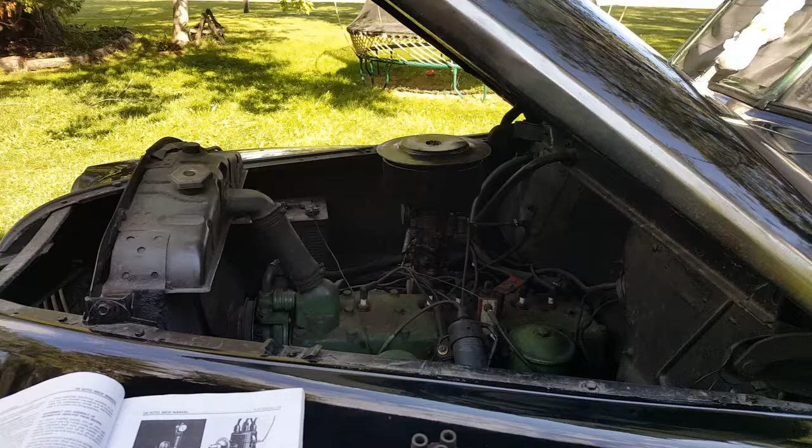Right, so if you watched my previous video, I showed the DeSoto finally starting again. The paint is coming out really nicely as well, I think. And see, very, very smooth, very mirror show car finish. Lots of dust outside though, but oh well.

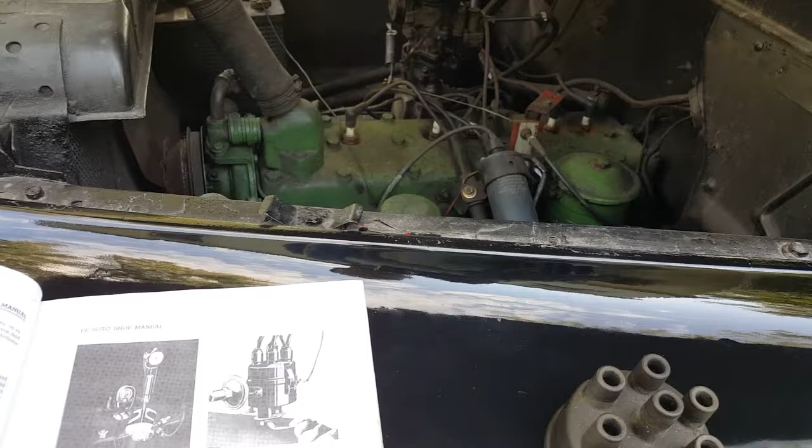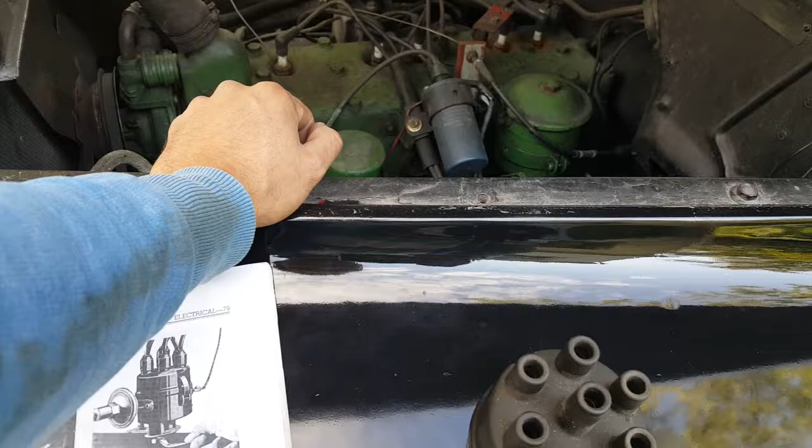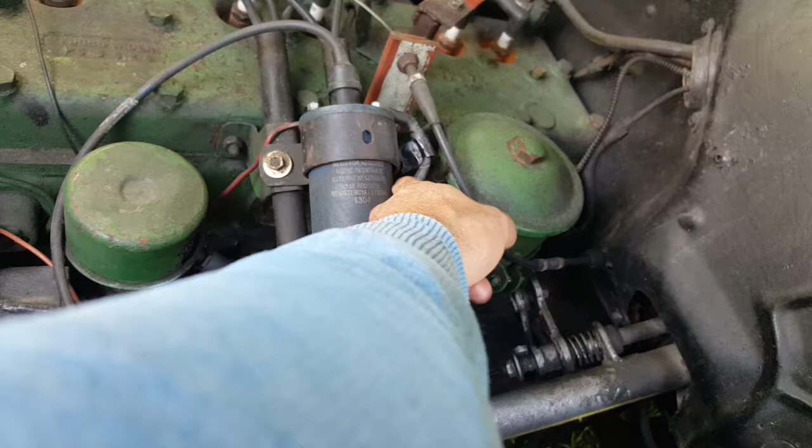So anyways, after checking, following the wires and distributor cap, so if you know the ignition coil is working and you know that you have electricity going to the wires, remember, when you turn on the ignition switch, it connects power to this wire here. The other wires just connect to the distributor and then to ground.

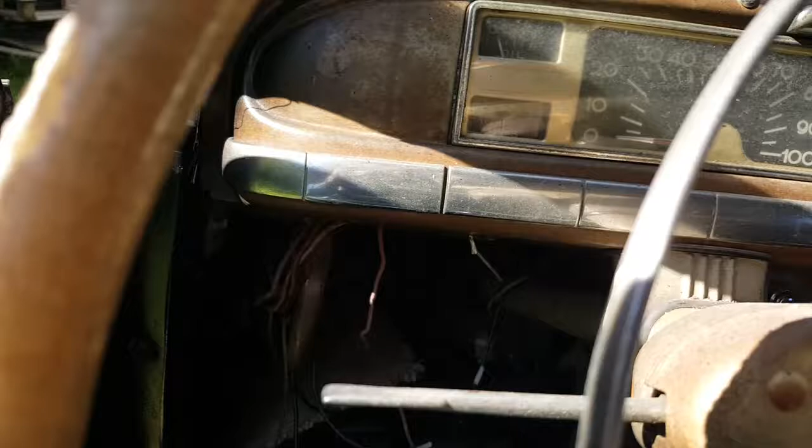So one indicator that you are actually getting electricity going to the coil is that when you turn the ignition on, the ammeter, I'll show you that in a second, will move. So just watch when I turn the key, it'll move. So right now it's at 0. See that? Off, ignition on, off and on. There we go. Turn it off.

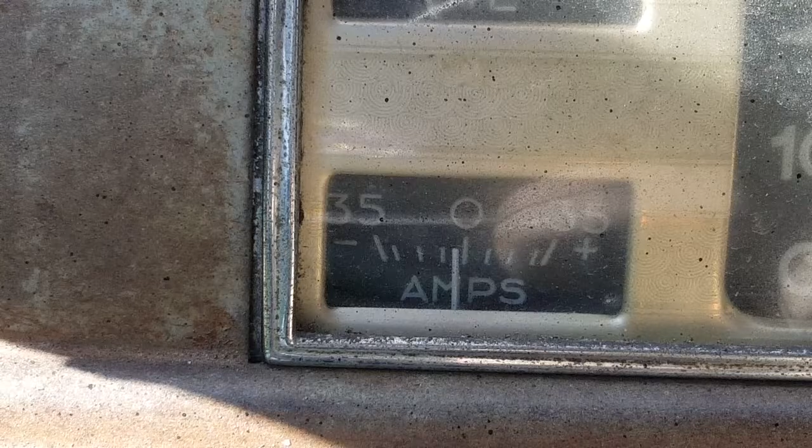Starter button there, by the way. There's the ignition key. So that's the ammeter. And the reason it will move is because the ignition coil, which is a transformer, will use up electricity. So if you leave the car in the on position, this might actually get hot depending on which position on the distributor it is in. If it's in a spark position, it will get hot. Okay.

But to make sure, you probably want to disconnect the distributor wire and touch it against something, see if sparks come out. But be careful, because I got a really nasty shock the other day. It won't kill you, but it'll give you a nasty shock if this wire isn't so good, which is the case here. Normally, if it's well insulated, you can hold it here without receiving a shock.

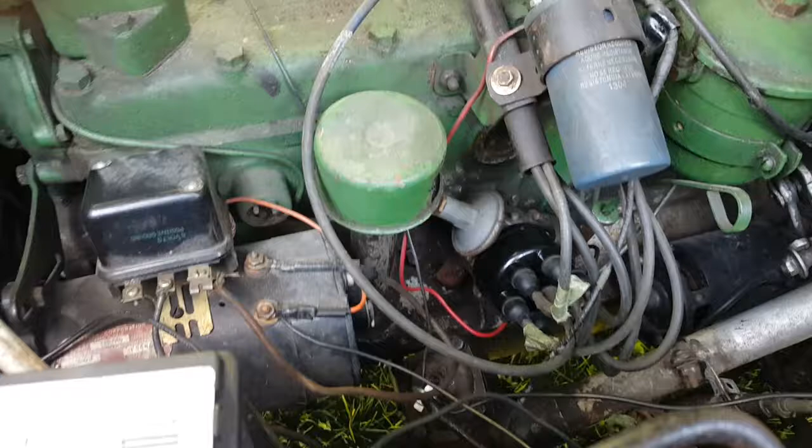But if it's broken somewhere, the electricity will leak through the break and go to your hand. So I know that the ignition coil was working from the nasty shock that I got. So I opened up the distributor, and sure enough, one of the most common problems you'll have is that there.

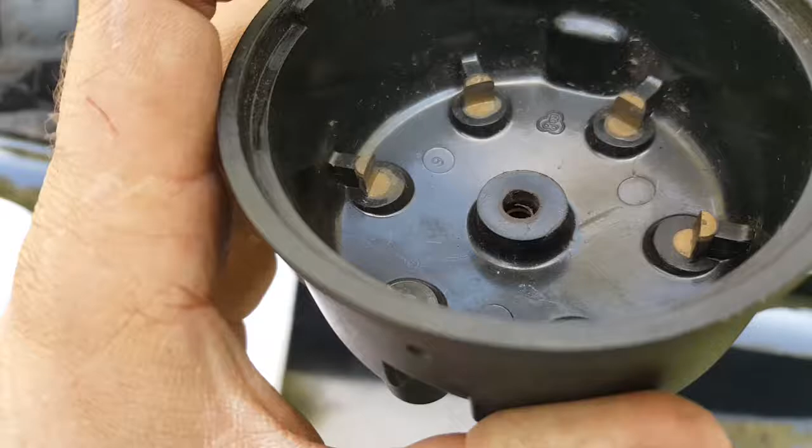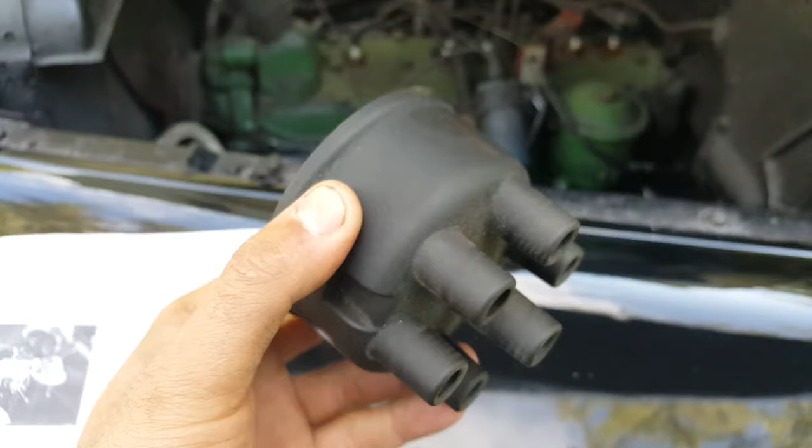As you can see, this distributor cap is missing the middle part. In this middle part, there's supposed to be a graphite rod, and as you can see, this one is missing. And there's rust there, there's a spring too, and it's one of those things that just happens. This is probably the original distributor cap from 1947.

I wish there was a way you could repair this. In an emergency situation, I could just stick in a pencil or a wire or a brass rod. That would be really nice in the middle there, so anything that would conduct would work here.

So the ignition coil goes to this middle part, through this carbon rod here, and to the top of the distributor rotor, which then rotates and transfers that spark, that electricity, to each of the spark plugs. It goes from here to there. So each one of these is for a spark plug.

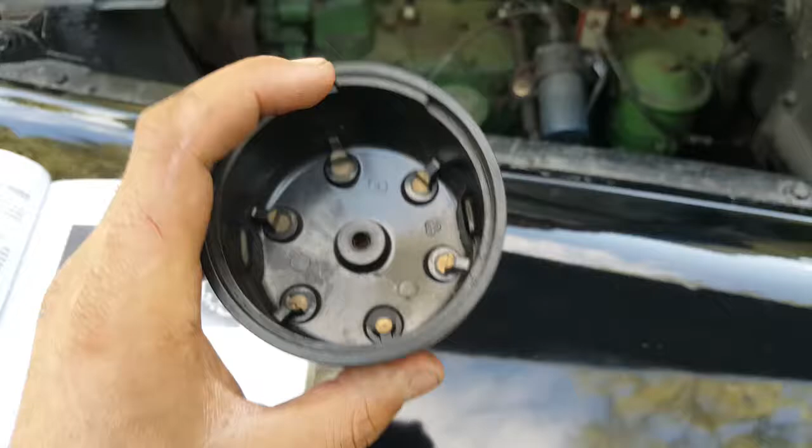Normally these distributor caps have a number so that you have a starting point for reference for which ignition wire or spark plug wire goes where. This one, I don't really think it does, or if it does, it's not really clear. There's a mark there, B with an infinity symbol, and there's a number 6 there, and indeed, this is where number 6 cylinder goes.

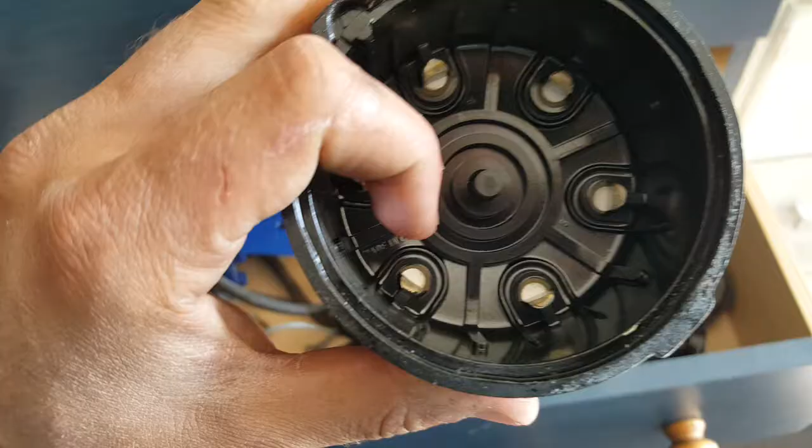But let me just show you what a new distributor cap looks like. This is what a good functional distributor cap looks like. You can see there's that little carbon rod in the middle.

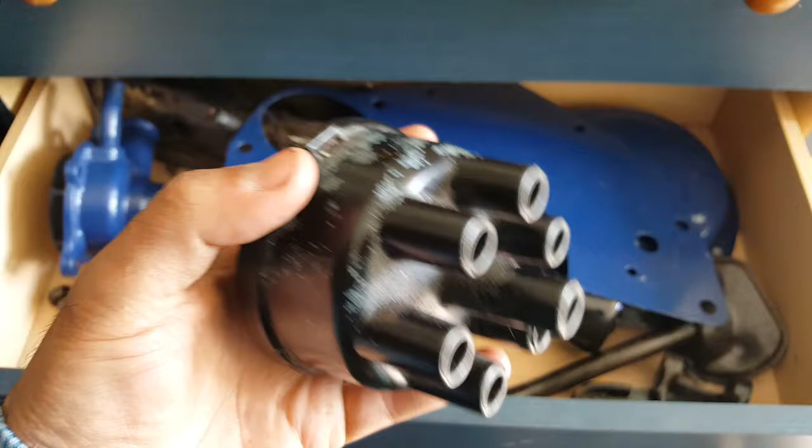Oh, and by the way, this is from the flathead on the 1963 Rambler American. And in an emergency situation, it would fit the DeSoto, believe me or not. It's not a direct fit because the clamps don't really match, but the diameter does fit perfectly. And if I was in an emergency, I would use this without a problem.

The distributor rotor, on the other hand, is a direct fit, and you can easily interchange them with the 1963 Rambler American, and I bet you most 6-cylinder cars. Just thought that would be interesting.

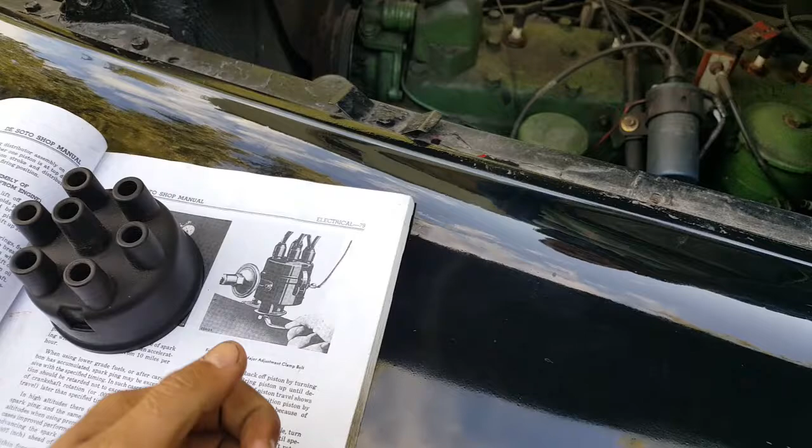So one of the first things you'd probably check, the most common problem, is this here. These distributors, like most things in these cars, are made of cast iron and steel, brass parts. Only the cap itself is plastic, but it's not really plastic. I think it's called Bakelite. But anyways, they're very durable. So the only thing that you'd probably break in a distributor is this middle part here. So probably one of the first things I check is that.

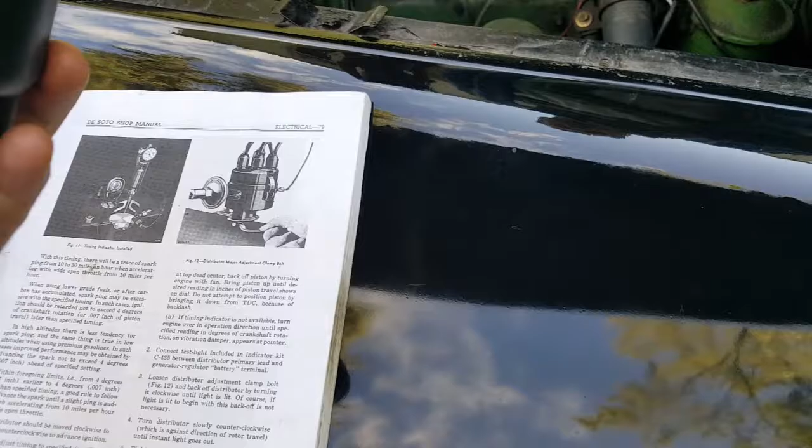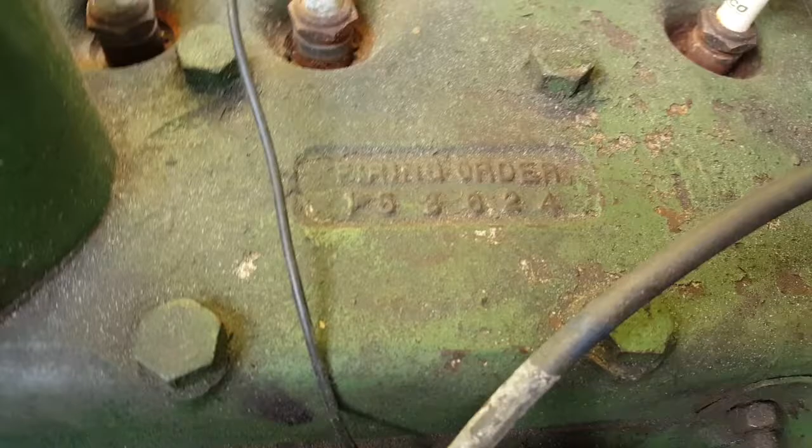Now, the other issue that I had is normally if you're going to replace the cap, you'd probably mark where the number 1 spark plug wire goes to. Reason being is, yeah, you think, okay, I know what the order is. Here on the engine it says 153624. However, you don't know the starting point of that order. So you could have the engine in a different firing position, let's say number 3 piston, and then you put the number 1 piston there in the firing order. Even though the firing order is correct, the position relative to the engine is not.

So the engine would not start, or it would at least run very badly. I don't think it would start at all, but in some cases I've heard of people saying that you could destroy an engine that way, although that's highly unlikely. It would probably just not start because the valves would be at the wrong positions. Okay, so that's why you'd normally want to mark the wires before you move them to make things easier.

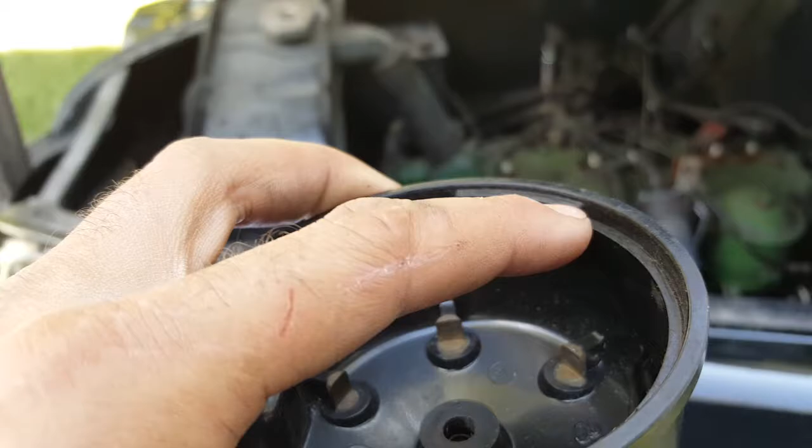If by chance you don't mark them and your assistants remove them, it was my fault. I didn't tell them to mark it first, so they ended up removing the spark plug wires. So I no longer knew what the correct position was. So fortunately on the distributor cap, that's why it's important here. Here's the reason why I need to have attention to detail. So if you look around it, right here, there's a ridge. Everywhere else on the distributor, it's just smooth. And over here you have a ridge, and that's there for a reason.

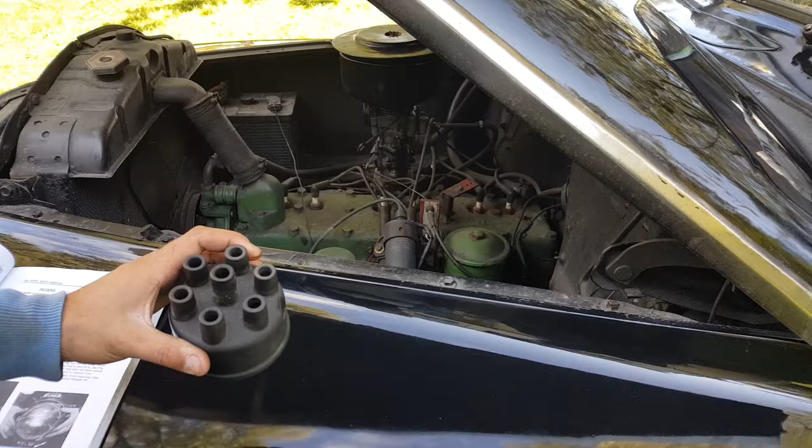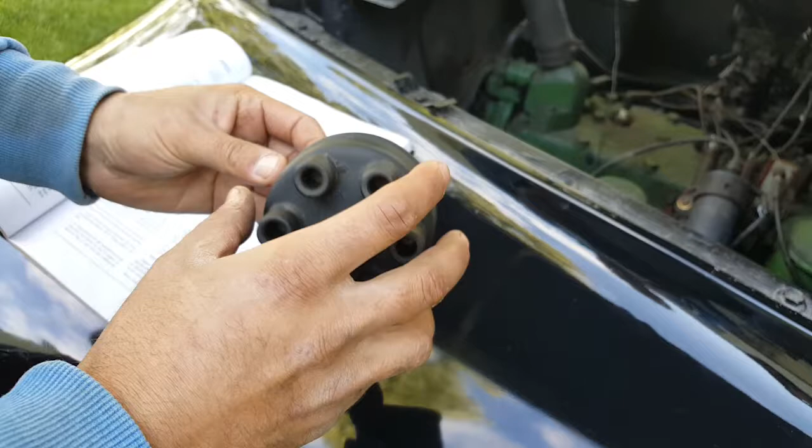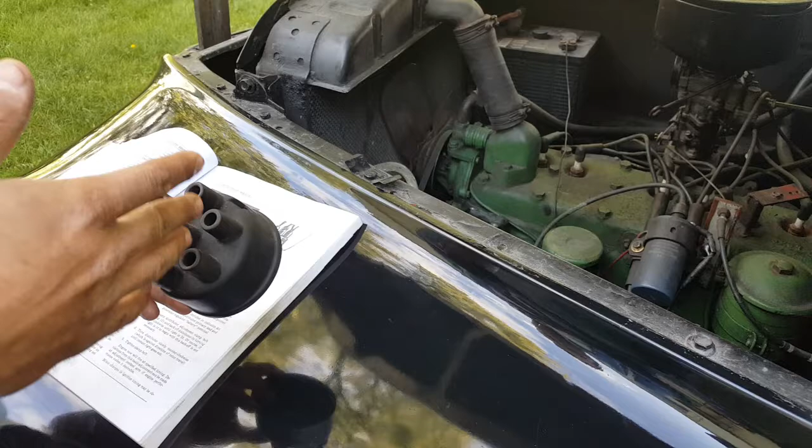That ridge matches on the distributor itself. So on the distributor cap, that ridge goes onto the distributor so that it's in the correct location, which happens to be about at left. So this distributor has a little hole, and that faces up at a bit of an angle like that. At first it took me a while to notice that, but that solves only one of our problems. It doesn't tell us which piston or which spark plug goes to which distributor cap point.

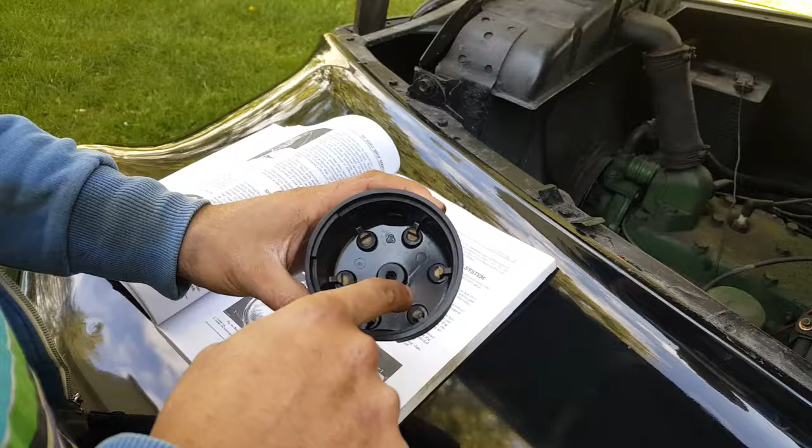In some distributor caps, you have them numbered, which is the case for the Rambler American. It says 1, so that you know which spark plug goes where. Fortunately, on the DeSoto, you go to the end of the electrical section. This is for the S10 model. This is for the S11 model.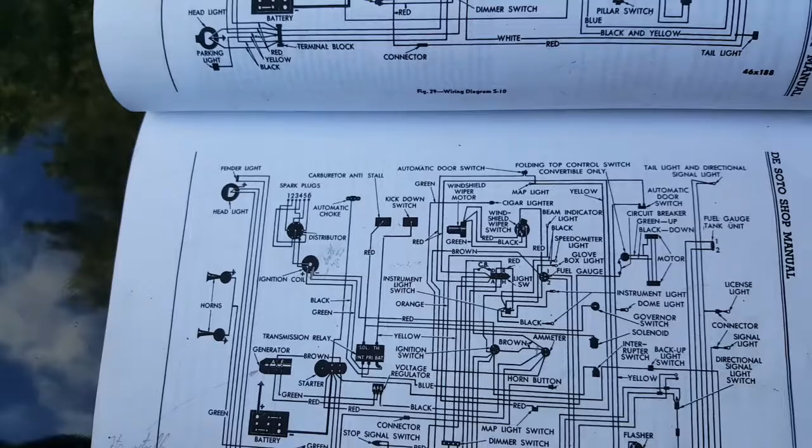And right on the distributor diagram there, it shows you where the wires go. You see some of these diagrams on other models, they're not to scale, they're not an actual representation, but in this case it is. So as you can see, according to that diagram,

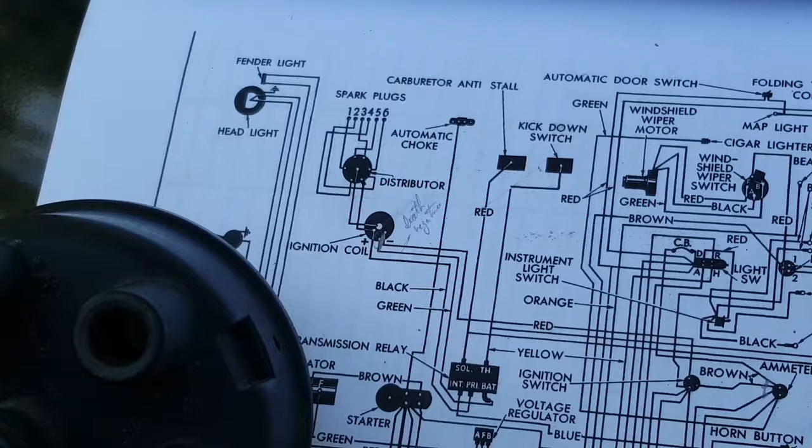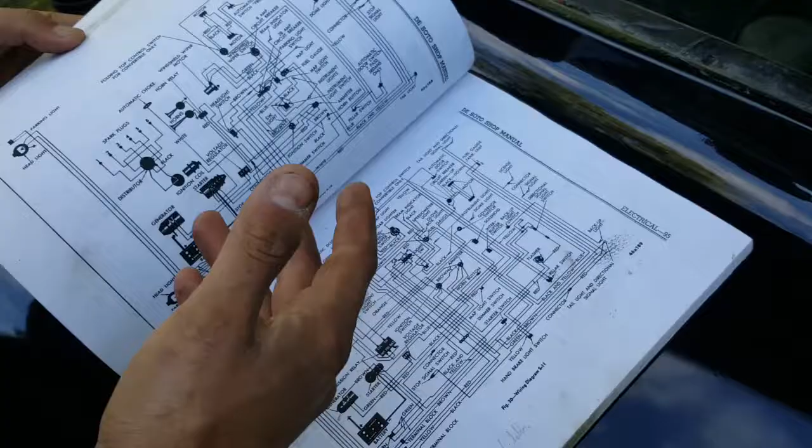number 5 would be this one here, and then number 3 would be this one here, and this one here is number 6. The one on the right is number 6, but as you can see, there's not really a mark there. So anyways, I have to check to make sure. This is why it's useful to have a manual.

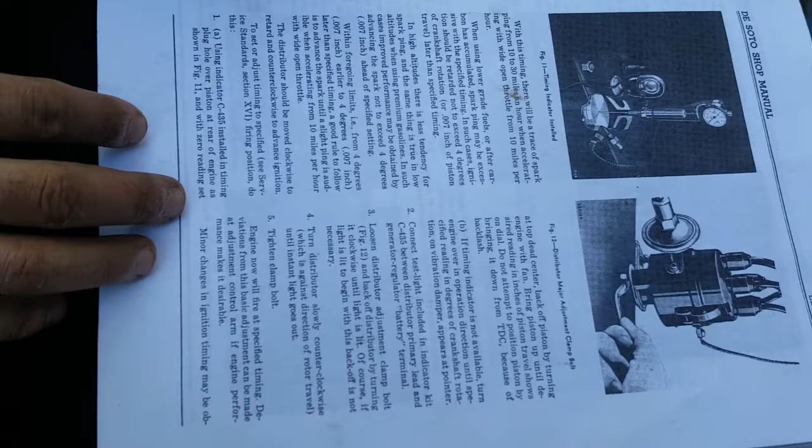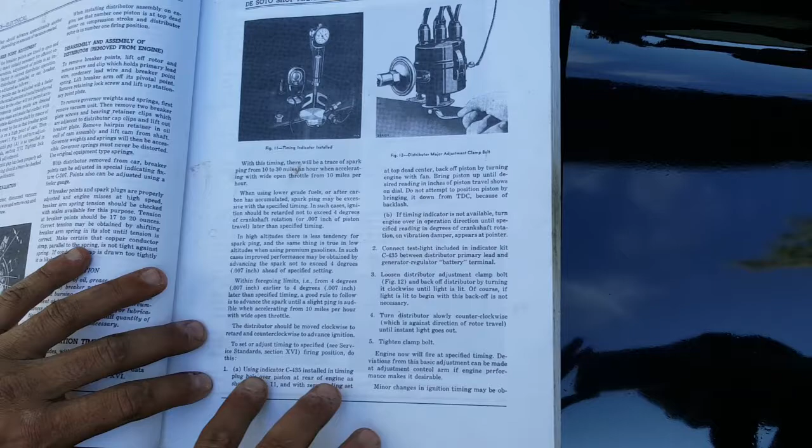So I went to the electrical section, which talks about the distributor, and it gives you the instructions on how to time the engine. And over here, to set or adjust timing to specified standards, firing position, use indicator, which is this one here. Install timing plug hole over piston at rear of engine.

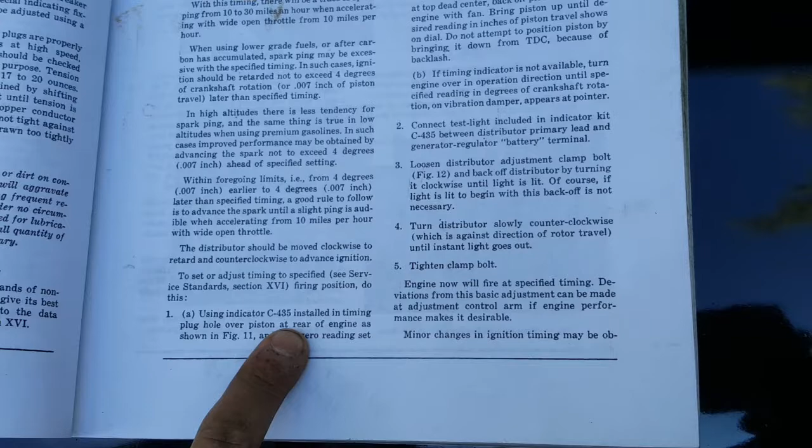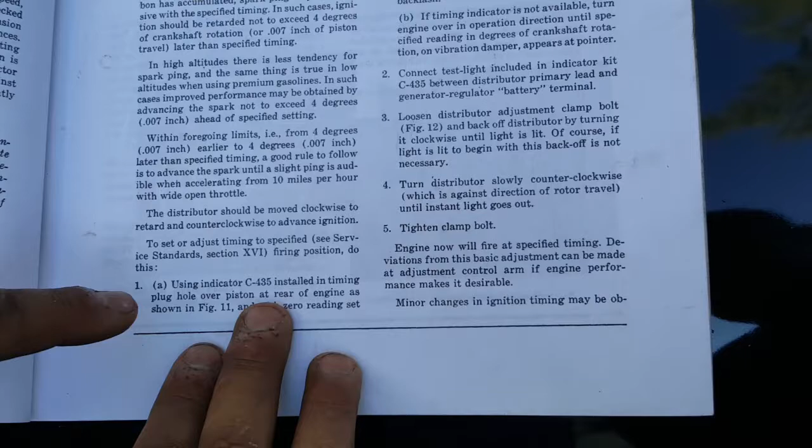And this is what really caught me. I'm used to most cars being timed relative to piston number 1. However, with the 1947 DeSoto, it's timed relative to piston number 6. That's why it says here, at rear of engine, as shown in figure 11. Figure 11 just shows the gauge for timing.

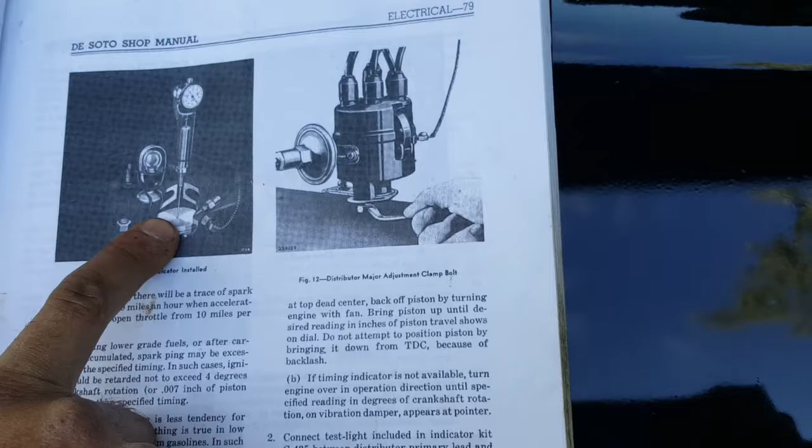In my case, I'm just timing it by feeler gauge, but at the rear of the engine, right there, as you can see, there's a plug, and that goes directly over piston number 6. So although the manual does not tell you it's actually piston number 6, it just says rear of engine, there's only one place where you could install that tool, because there's only one plug that's small, and it's directly over the piston, this plug here.

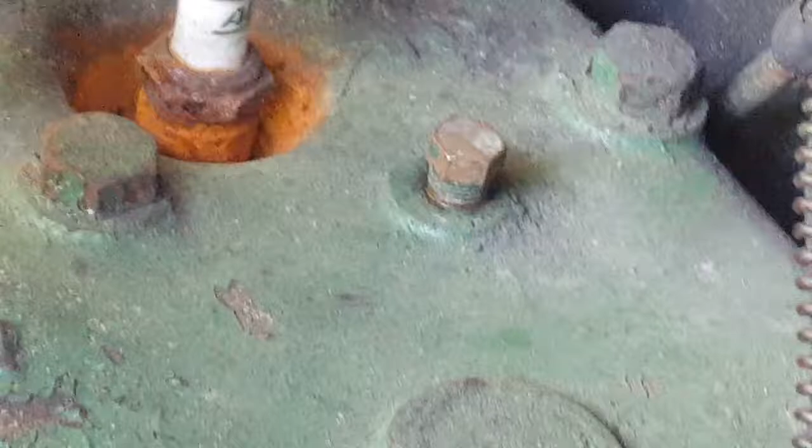You don't really need to remove it, but it just goes to show that this engine is timed relative to piston number 6. So piston number 6 at top dead center. That's what really confused me the other day, and we finally solved it. So you line up the marks.

That plug is really useful if you can't see the marks on the crankshaft pulley, which is usually the case. So you can mechanically know that piston number 6 is at the top. You just poke a wire in through that hole. Just be careful not to leave it there. So I removed that plug and made sure, sure enough, piston number 6 was at top dead center.

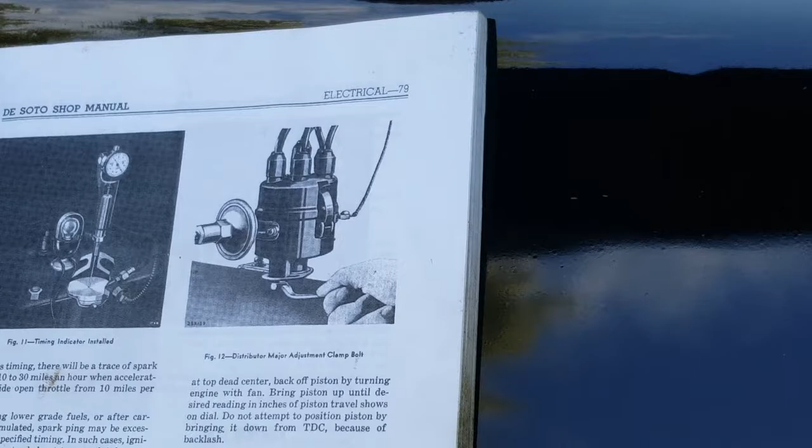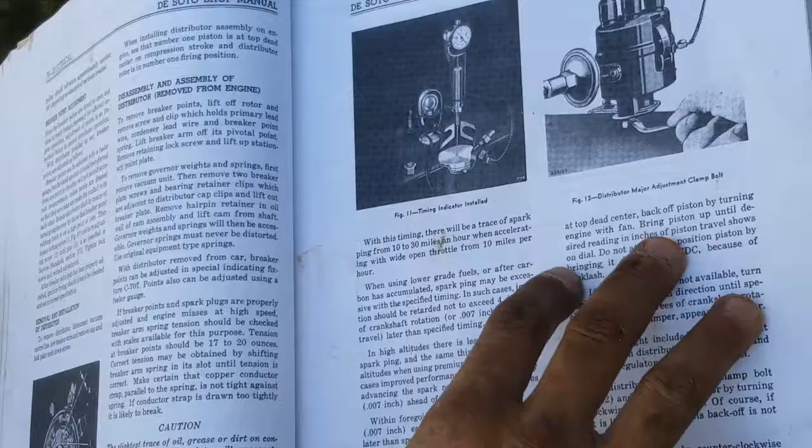And then I looked at the distributor cap and located where the rotor was at, and I put spark plug wire number 6 in that position. Once again, similar to the Rambler, there's 2 positions where it could be at. However, from the diagram here, you can know which position is the correct one, which is towards the top.

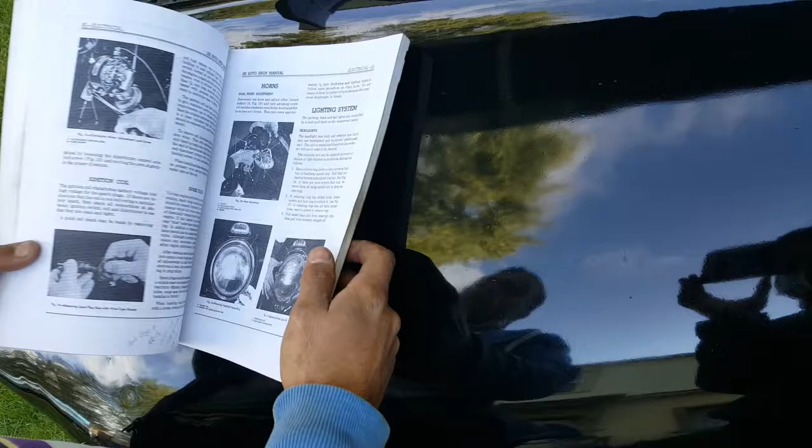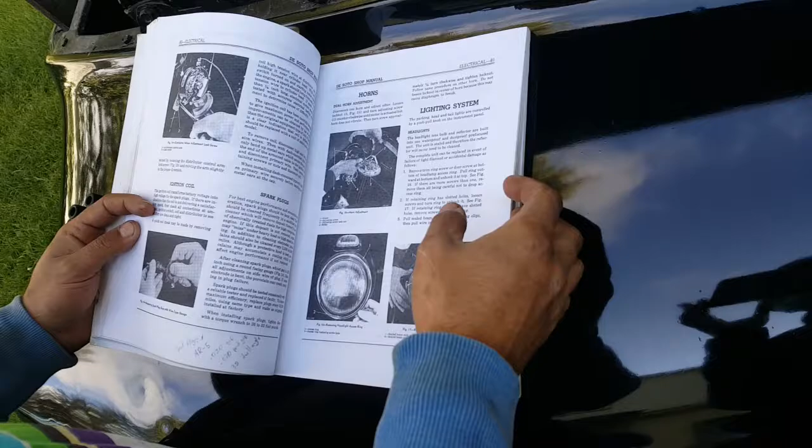So it's at a bit of an angle like that, the rotor. Just in case you're wondering, I'll show you in just a second. But if you got it wrong, you just have to reconnect the wires at the other top dead center. So I'll just zoom in there for you in just a second.

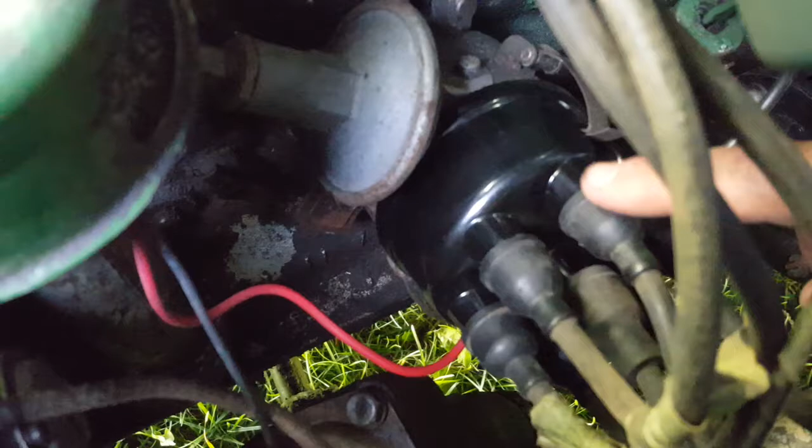So these are the wrong spark plug wires for this car. The spark plugs are correct though. Here's number 6. And as you can see, there's number 6 right there. It's actually slightly different to what's on the manual, but there's piston number 6. So hopefully this helps somebody out there.

It's basically the number 6 spark plug goes to the first terminal on the distributor cap that's on the left of the clamp here, or to the hole, if you will, looking from the side of the car, to the top of the distributor.

This distributor rotates clockwise, different to the Rambler that rotates counterclockwise. So here's number 6, then 2, 4, and then 1. 1 is at the very bottom. 5, and then 3, and then there you have it. So hopefully this helps somebody out there.

I imagine this applies to other cars of that era. Later on, until today, all cars are timed relative to piston number 1 at top dead center. But once again, on the DeSoto, it's relative to piston number 6 at TDC.